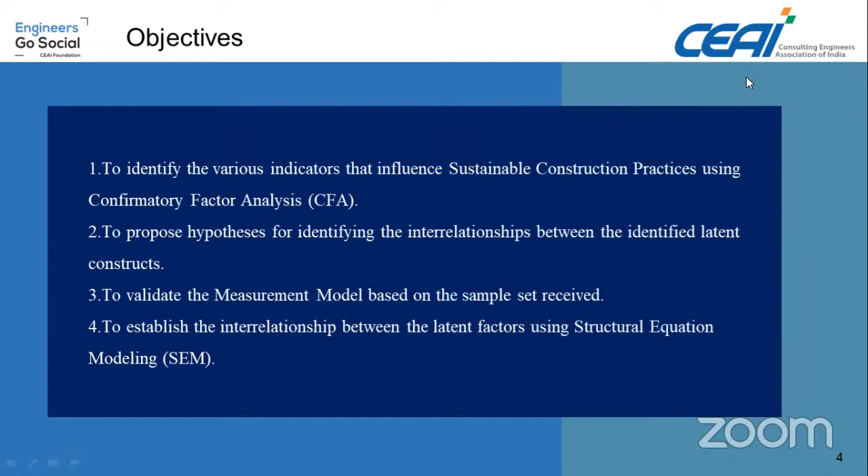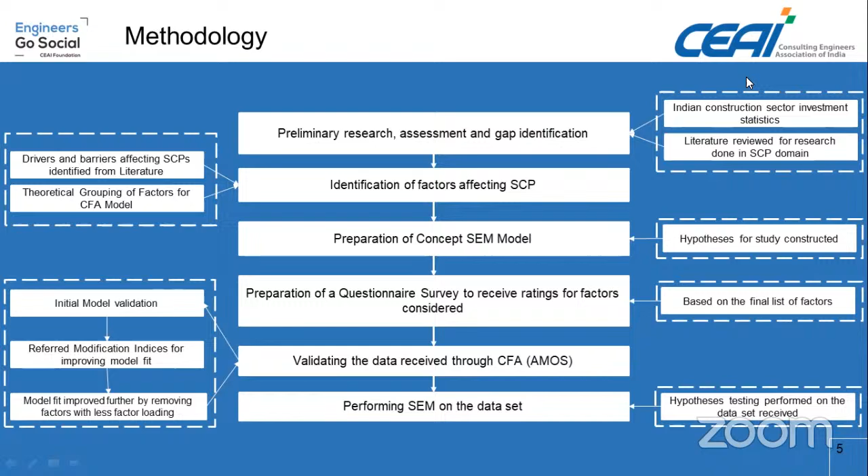For this, a measurement model needs to be first developed and then studied using structural equation modeling. Overall, this was the methodology of the study: I first identified the factors, shortlisted them, proposed a concept model, prepared a questionnaire, validated the model, and then tested my hypotheses using structural equation modeling. In CFA, we need to theoretically group the various factors identified from the literature. I had identified close to 17 factors from the literature.

These were grouped into five latent variables, which you can observe on the left side, with codes of the relevant factors mentioned as well. This was the concept model proposed for my study, along with the substantial hypotheses we proposed to study and identify whether they were null hypotheses or had an actual effect on the overall dynamics of perception. After the questionnaire was prepared, it was floated through LinkedIn.

And it was floated to 6 major stakeholders who can be classified as designers, green building consultants, contractors, project managers, client, and academia. I needed a minimum of 95 samples, and with a minimum of 103 samples, this study was carried out.

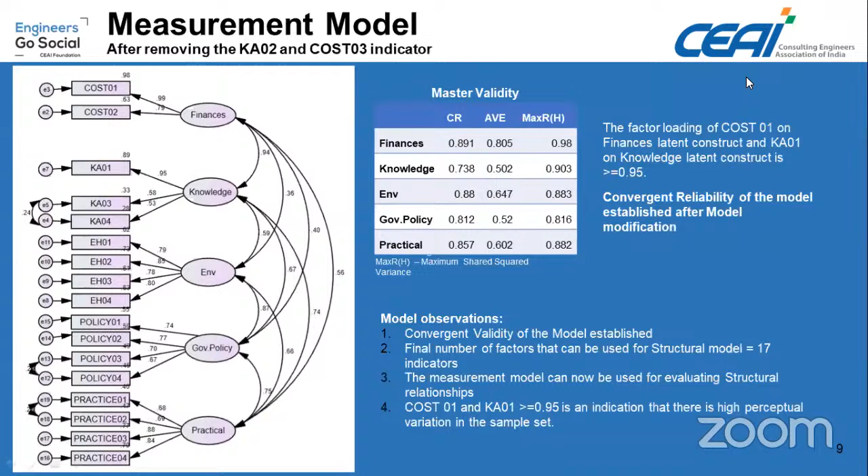The measurement model basically allows me to validate all of the responses that I've received, and it allows further tests to be calculated and carried out. With this, I received a good go ahead on the measurement model.

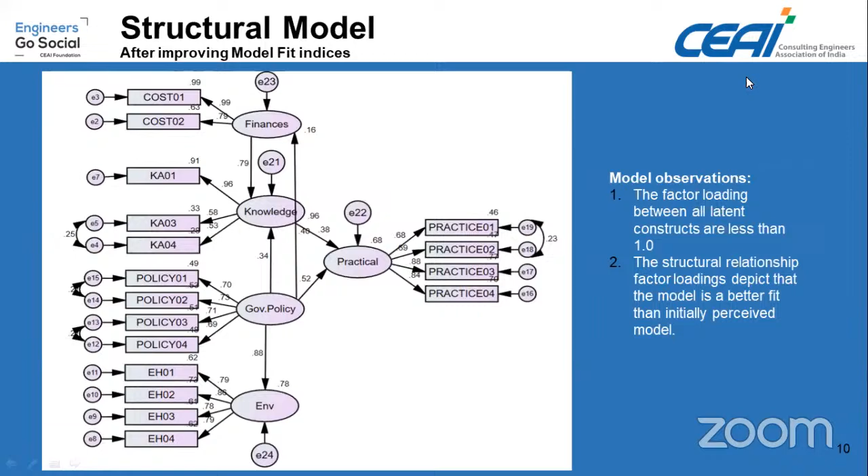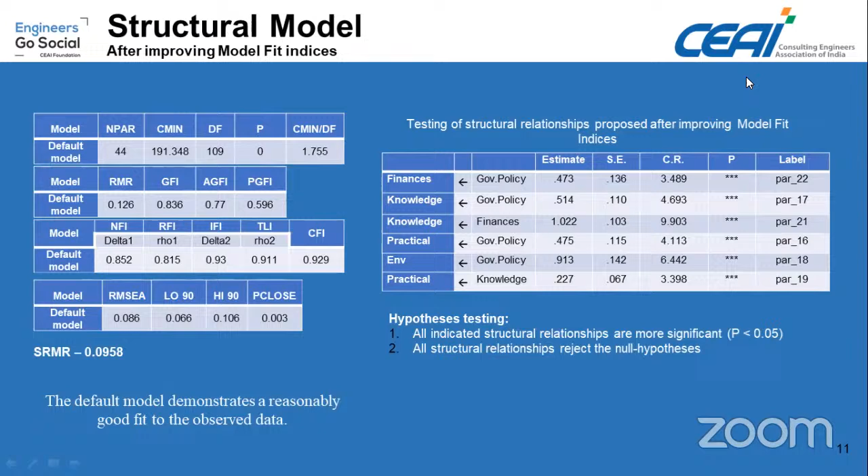After receiving my model fit indices, a structural equation modeling was performed in AMOS software. The path diagrams within the latent variables are the hypotheses proposed in the earlier phase. After performing the weighted calculations of the hypotheses, we found that all the hypotheses are valid, because in the right hand side table, the p-value is significant, which indicates that these hypotheses are very valid and that each factor has a subsequent effect on the next adjacent factor.

With my concept model being validated, I found out that financial decisions have a major impact on structural sustainable construction practices that are taking part in India.

And that's it from my end.

Good afternoon, everyone. I am Shailesh Biradar from Balaji Railroad System, India's first railway consultancy, assistant manager in business development and proposals, also MTech scholar from NIT Surat.

So the research gap is we don't have a collaborative construction project study in India. Abroad, we have several studies, but for the Indian perspective, we hardly have any papers.

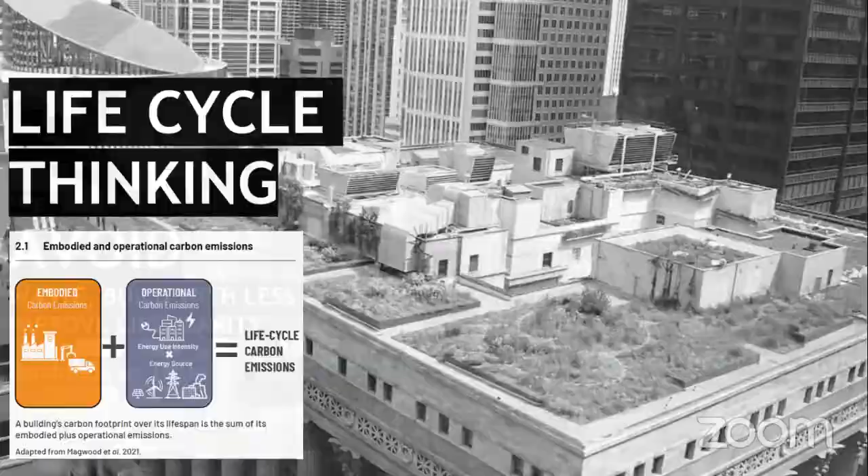Starting with life cycle thinking, carbon is mostly thought of as operational carbon, that is heating, cooling, and lighting systems, but there is also embodied carbon in material sources. So to have that perspective, we need to think about the total embodied carbon, the sourcing of materials, the sustainability, and also the operational phases.

So the first step is to avoid. First we want to avoid waste, we want to build with less. We want our designs to be right where it's needed, so the dimensions are accurate, and we try to propose circularity so we can reuse different components and reuse our buildings overall.

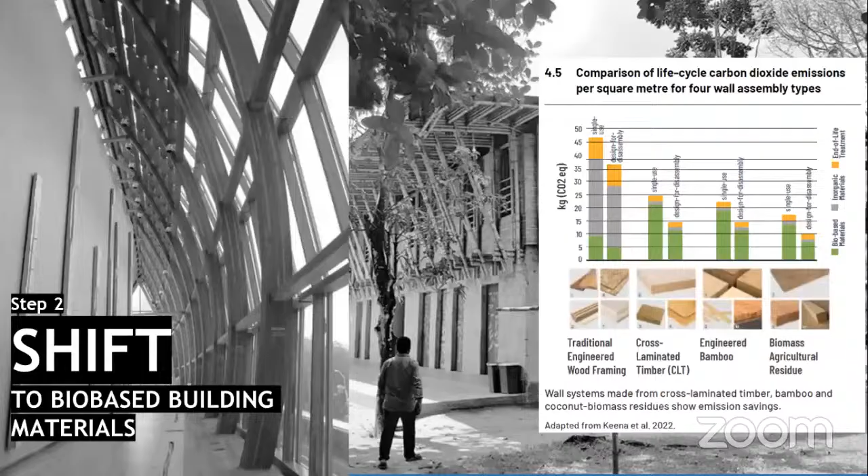Secondly is the shift. First is to avoid waste, then shift to bio-based materials. For our load-bearing components, we propose to continue with concrete and steel, but for other materials we tend to propose materials that are more sustainable to nature, mostly bio-based.

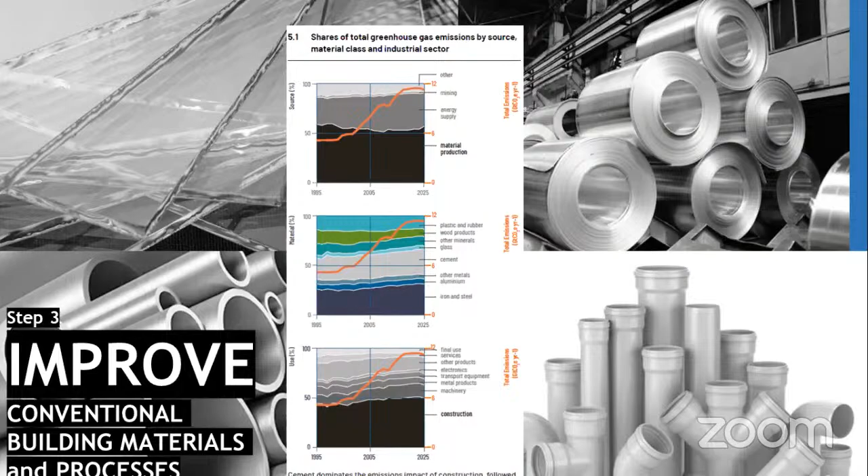Third is improve. The conventional building processes use different materials like glass, aluminum, steel, and polymer. We propose improvement of the production process and the use of those materials in our building system.

Next, what tools can we use to understand how much embodied carbon we have and how green our buildings are? There are a few tools: life cycle assessment, GHG protocol, environmental product declarations, then PEFs and OEFs. These help us understand the total embodied carbon and operational carbon of any building. Now that we understand the steps and how we can measure, we need to incorporate them into policies.

Under the Global ABC, we have so far worked with 7 countries: Cambodia, Vietnam, India, Indonesia, Colombia, Sri Lanka, Burkina Faso, and we are working on more countries. Currently we are working in Bangladesh.

In India, Prime Minister Narendra Modi has proposed that the total industry should go green by the year 2070. So we have come up with proposals aligned with this three-step process: avoid, shift, and improve.

Lastly, I'd like to say it's not that difficult. Our built environment gives us the space we live in and develop ourselves, but it is not very difficult to green it. We were green before. For rapid growth we tend to choose more carbon-producing materials, but we have the solution and we will do it. Thank you.

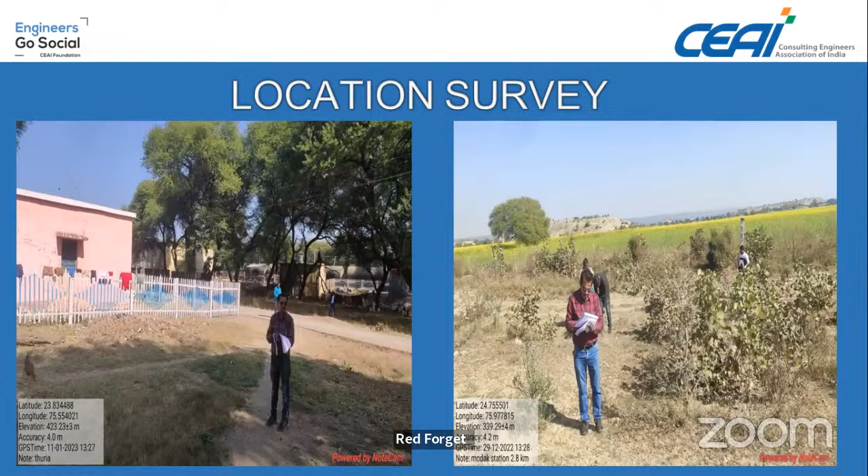There appears to be some network problem. The voice is not clear.

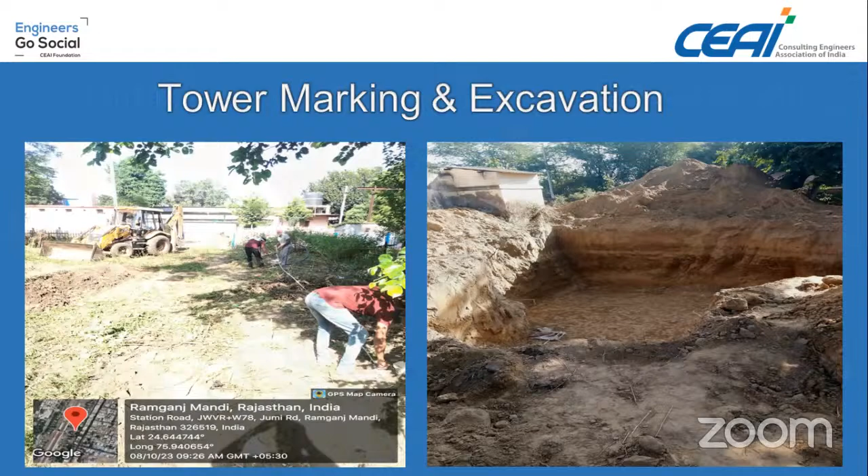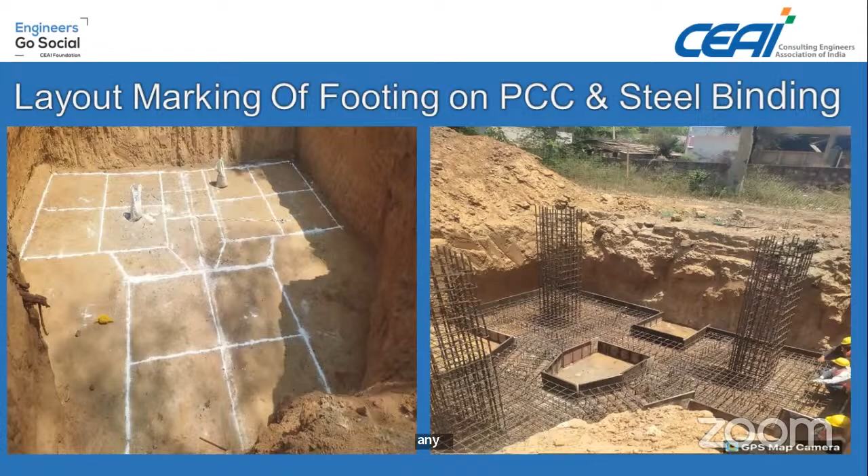Tower marking complete, from tower. Excavation complete. Layout of markings for footing tower, PCC, and steel binding - tower marking complete. Bending.

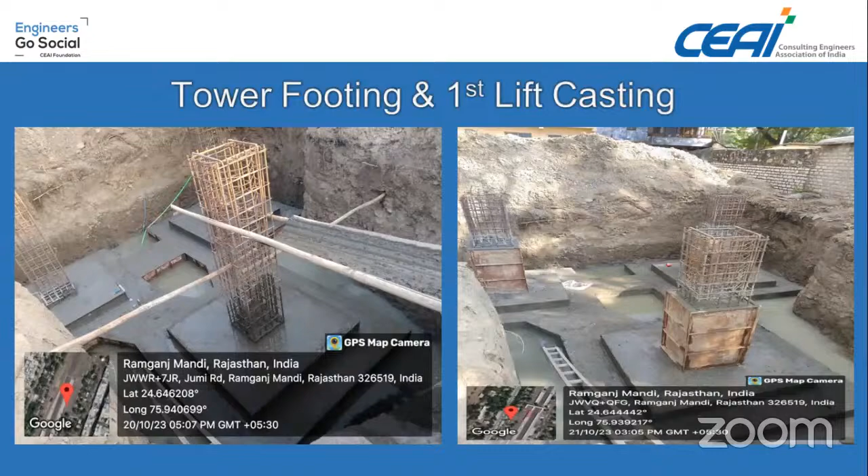I think there is some network issue here. We can skip, we can meet.

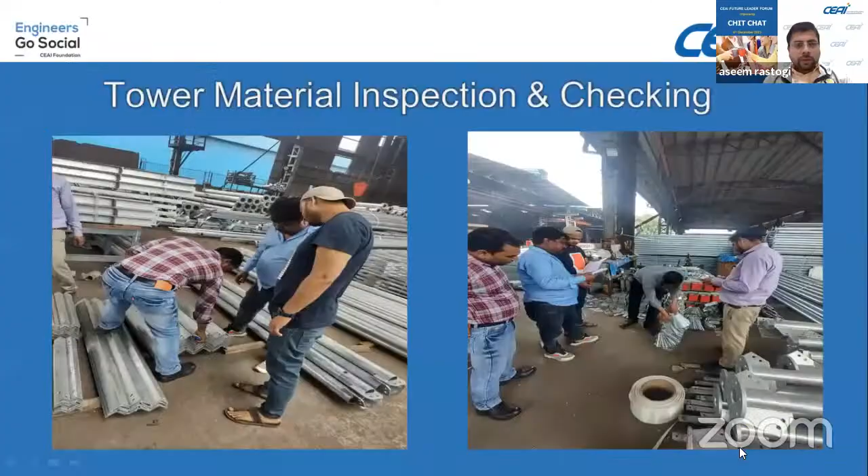Wait, Sophia is not able to unmute. Can you hear me, sir? Yes, Sophia, we can hear you. Yes, thank you sir. You can switch on your video also now. Sorry sir, I'm actually traveling, so I couldn't switch on from the laptop. Okay no issue. Just ask Meher, please, you start the presentation.

Good evening to everyone present here. It's me, Sophia Emanuel, PhD scholar from NIT Trichy. So today I'm taking something out of tech, that is the seashell serenity, the soothing sound of the sea.

Talking about the seashell, we all look for something in this busy world. From morning to evening, we are stressed with so much work - deadlines, assignments, tasks to complete. Since we have a lot of deadlines, we always try to seek a place where we can sit calm, relax ourselves, and calm our mind. So today I'm going to talk about something that's really amazing to me.

That's nothing but something very close to the ocean, very close to the sea. So we all search for something kind of yoga that connects us to nature, or kind of meditation. Every one of us sits and ponders on what strategies each one thinks about - we have many. Coming from Andaman and Nicobar Islands, being an islander, I always seek to be close to nature, close to the ocean.

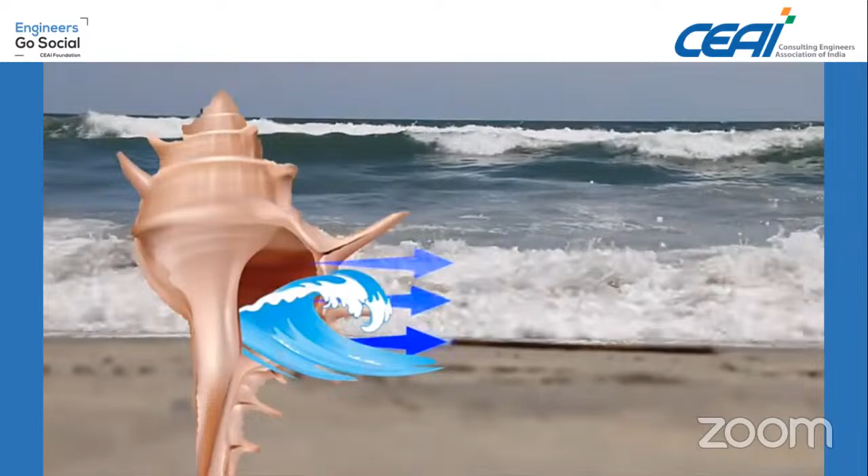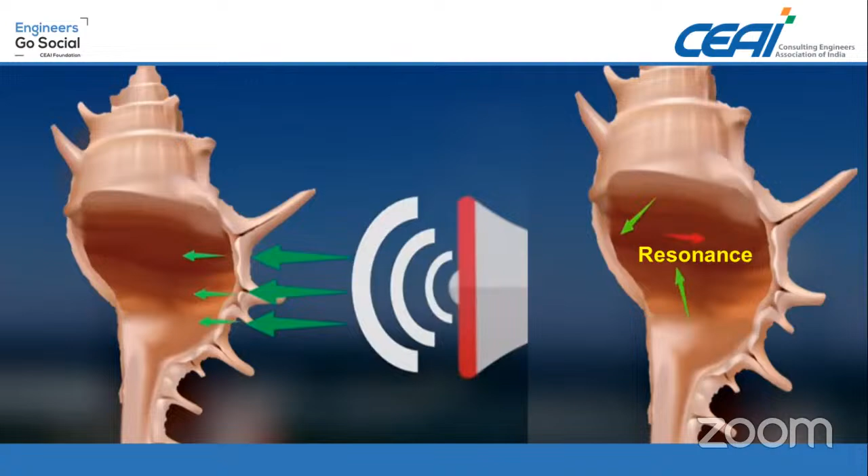These amplified sounds create a resonance and produce a soothing, whooshing sound reminiscent of ocean waves. To talk more about these seashells, they are very close to a sacred emblem in our nation - in India we call this Shankha. It's also known as the divine conch. This Shankha has deep significance in various cultures and religions, particularly Hinduism and Buddhism. It's very sacred, and people think that earlier the tribals used it for driving away evil spirits.

Recently it's used in homes so that when you blow it, these acoustic waves get amplified, and this noise is believed to invoke positive energy. It's because of this spiral shape that symbolizes the infinite cosmic energy that it can retain.

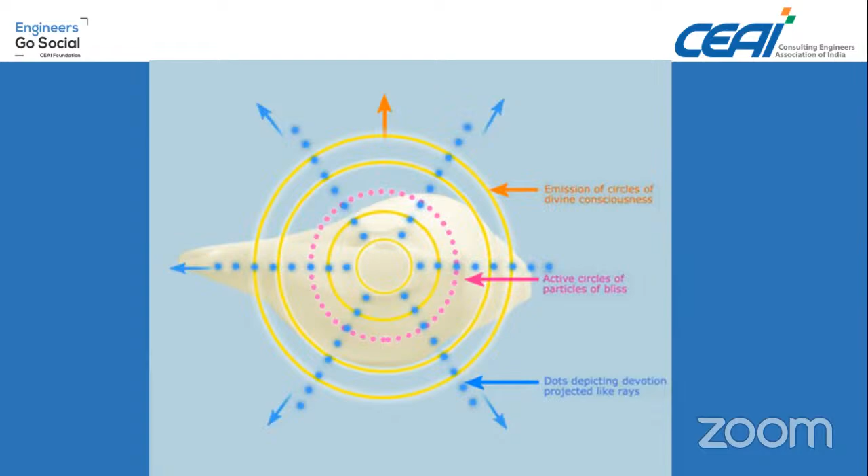Talking more about it, I would just like to say a simple seashell is just a portable way that can bring a lot of tranquility in your day. It can really soothe you and calm you wherever you are - it doesn't have to be close to the sea and ocean. So today, this is just a takeaway from my experience - I would really travel along carrying the seashell. Thank you for giving me this opportunity to participate in this chit chat. Thank you.

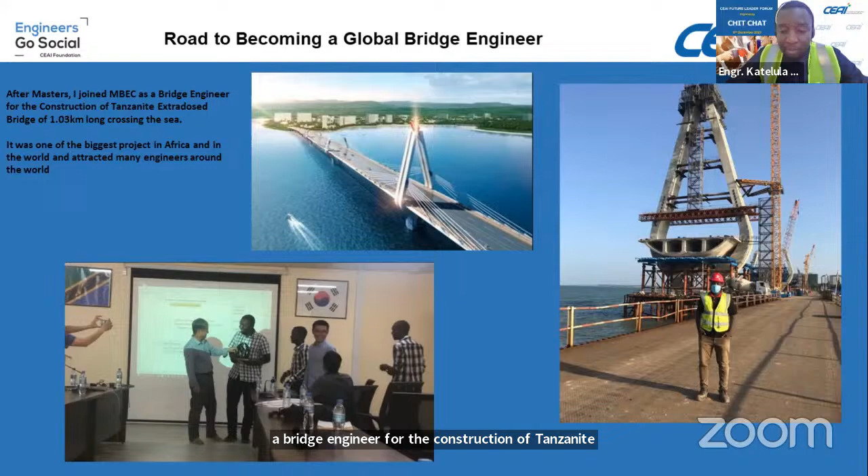Back home, after my master's degree, I joined MBEC as a bridge engineer for the construction of Tanzanite Bridge, which is one of the longest extradosed cable bridges in Tanzania, and also one of the biggest projects in Africa and in the world. It attracts many engineers around the world, and for me, I believed that this was the number one project in Tanzania, and if I became number one in this project, then I'd be number one in the world and able to work everywhere.

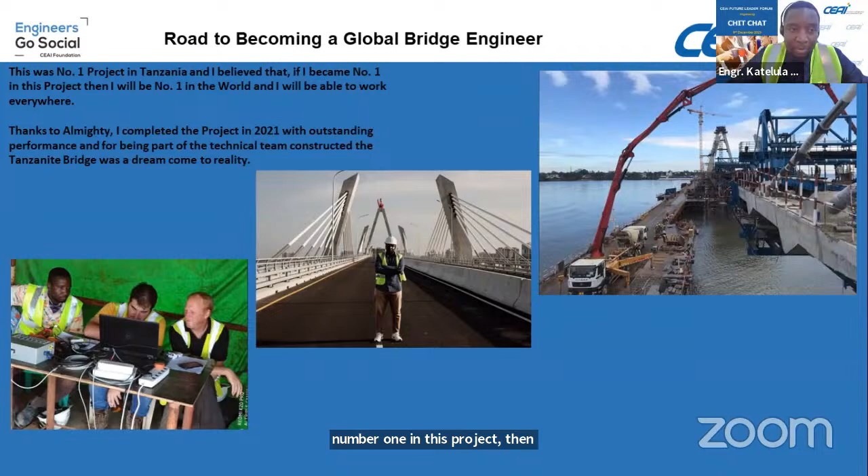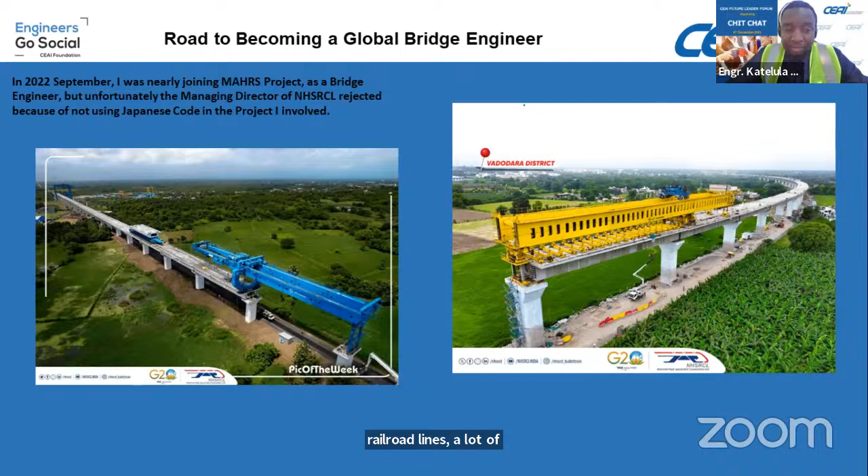Thank God, I completed the project in 2021 with outstanding performance, and in September 2022, I was nearly joining the MAHRS project, one of the longest railway lines with a lot of bridges in India. Unfortunately, I didn't manage to get the opportunity - I was rejected by the managing director. But it was a motivation and an inspiration for me to get an opportunity to be involved in or interviewed for such a project.

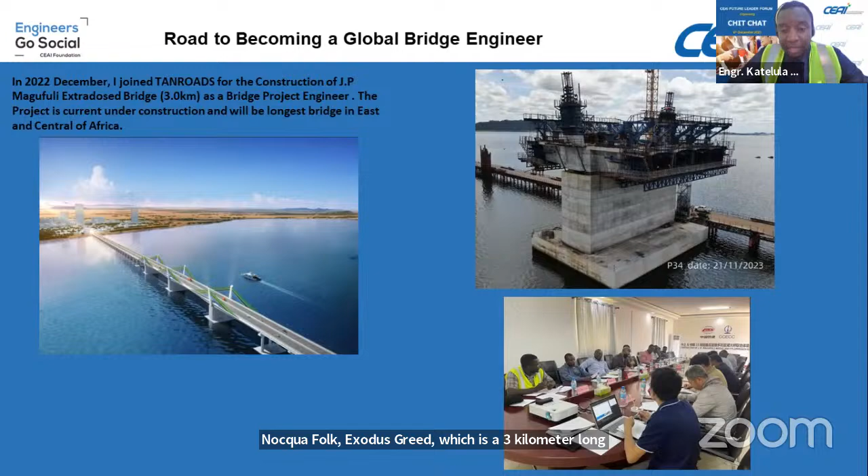In 2021, I joined IABSE, the International Association for Bridge and Structural Engineering, with the purpose of sharing and seeing what other people are doing. In December 2022, I joined TANROADS for the construction of the JP Magufuli Extradosed Bridge, a 3-kilometer long bridge, the longest bridge in eastern and central Africa. Being the leader and engineer of this project gave me an opportunity to grow more, because this is my second extradosed cable bridge in my career so far.

We used to dance when I was in China, with my friends, with my colleagues, and travel a lot - to Turkey, South Africa, India - to learn more about bridges and to get an opportunity to interact with other people around the world. For me, this is the inspiration for myself, my family, and other young engineers who want to become a global bridge engineer, because if you get an opportunity, you can become a global bridge engineer.

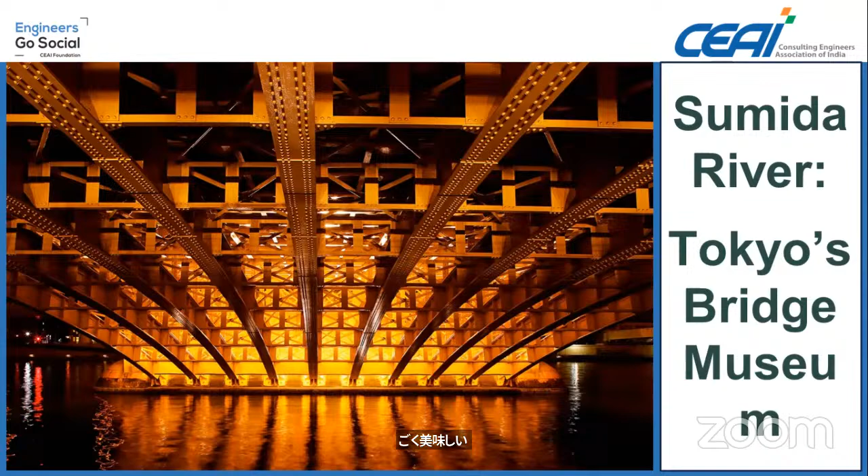Beyond being a symbol of beauty and serenity, it stands pivotal to the growth of Tokyo, inspiring generations of artists and engineers alike. From the lively riverbank captured in this image of 1963 to the modern-day skyline, graced by 26 engineering marvels over a 27-kilometer stretch of the river, the story of Sumida is etched in its bridges.

Once shattered by the Great Kanto earthquake of 1923, these structures now stand resilient, telling tales of determination and innovation. They not only survived wars and bombings, but stand tall as testament to Japanese steel engineering prowess.

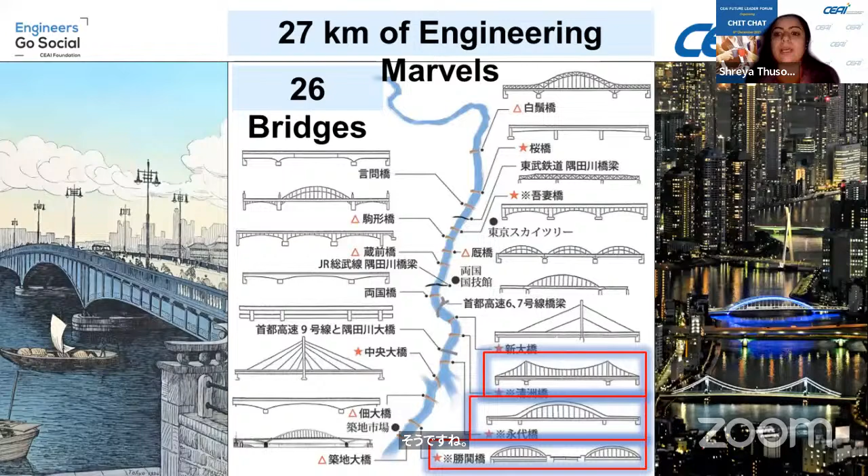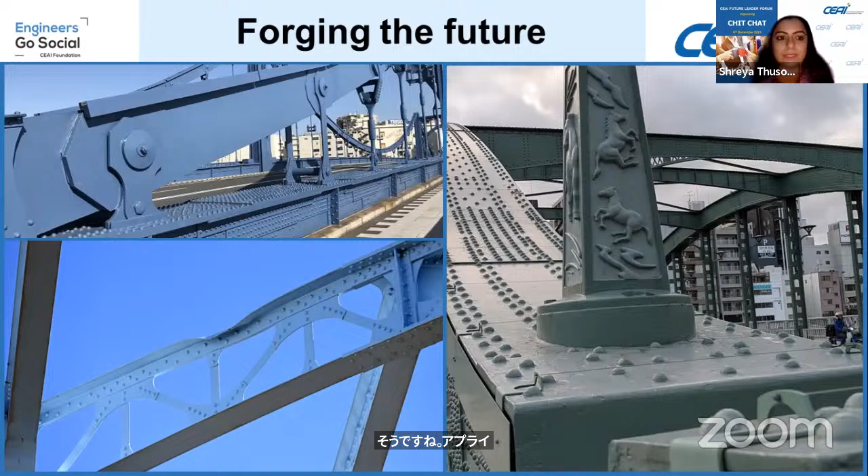Their construction was part of a revolution in bridge engineering, led by a young engineer like us, Mr. Yutaka Tanaka. After returning to Japan from Germany, he brought with him revolutionary bridge engineering techniques, and as head of the Reconstruction Bureau after the earthquake, he applied cutting-edge methods, crafting bridges that are virtually indestructible and can survive the test of time.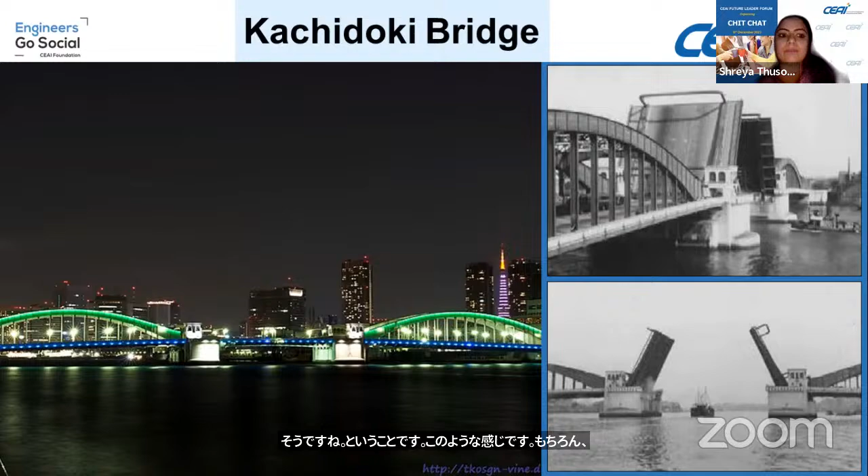Greeting you at the entrance to Tokyo is the Kachidoki Bridge, which proudly boasts the world's first design of a bridge using Ducol steel, a naval innovation tailored for strength. At a time when resilience was of paramount importance in Japan, this shaped the design philosophy of that era.

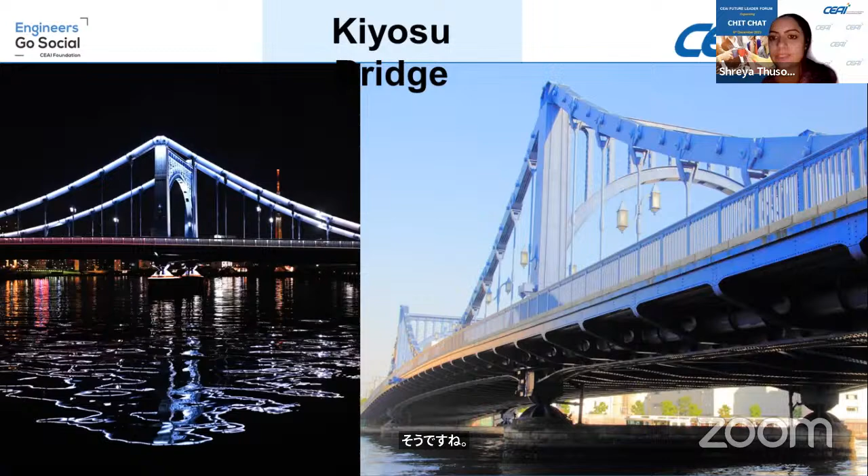Kiyosu Bridge and Eitai Bridge opened in 1940 and were the first in Japan to use a pneumatic caisson foundation, a technique borrowed from America. By its second application in this Kiyosu bridge, Japan had already developed its unique specifications for design against earthquakes, a testament to Japanese engineering prowess and understanding of earthquakes.

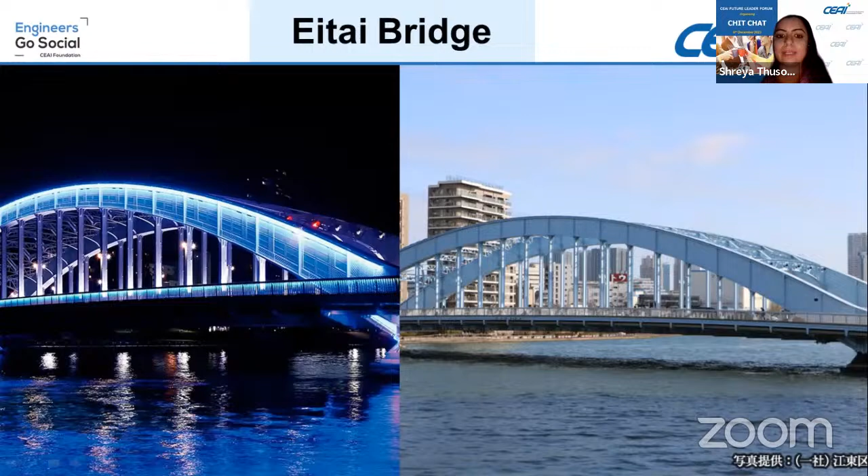Even now, these bridge foundations don't show soil damage, and they are not affected by the earthquakes that directly hit the Tokyo metropolitan area. These bridges are designated as bridges of national importance.

Another philosophy developed at that time was uniqueness in design. Diverse shapes were chosen deliberately to prevent all structures from becoming obsolete at the same time. Each bridge now proudly showcases its individuality. Even the colors of each bridge are different, signifying the history behind them.

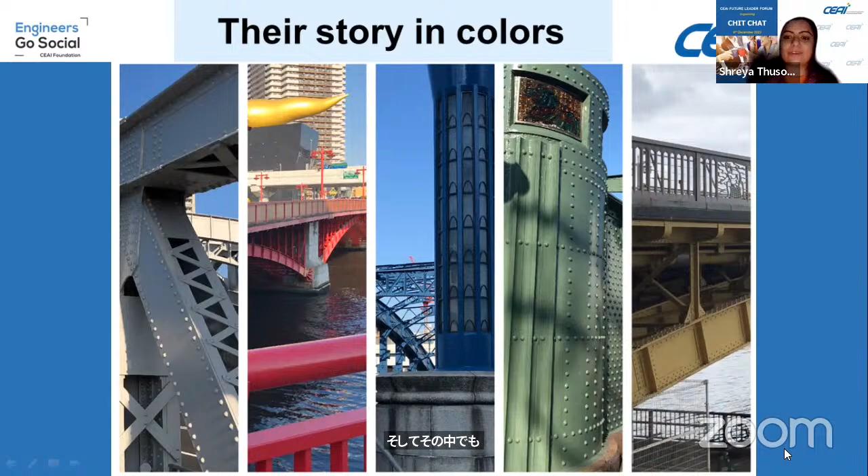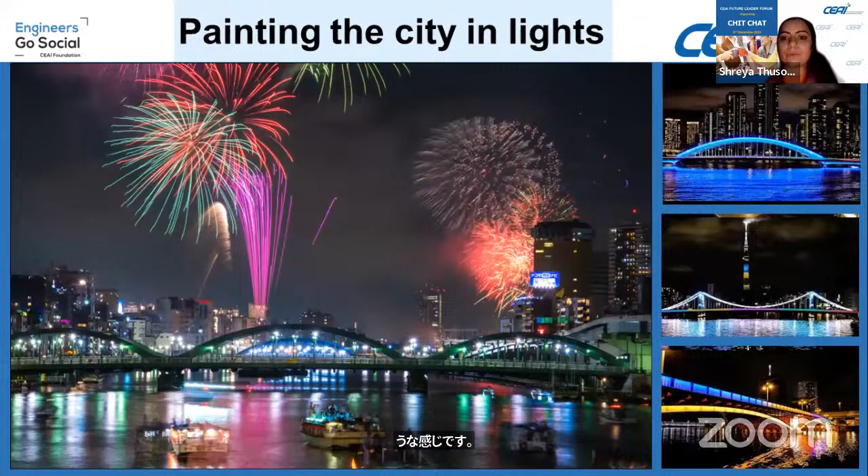Recently, they introduced LED lightings for the 2020 Tokyo Olympics. For the LED lightings also, they underwent careful research and deliberation to choose each lighting color. The resulting symphony of lights, bridges, and summer fireworks creates an awe-inspiring spectacle that just makes you want to be there in Tokyo.

So next time when you visit Tokyo, be a proud bridge nerd and take a cruise in these futuristic looking ships, these boats, so that you can spot innovations in this open air bridge exhibition. Or you can just take a leisurely stroll on the Sumida Terrace for a romantic evening.

Until then, like me, when I miss Tokyo, you can turn on Google Earth, go 3D, and dive into the stories behind these 26 bridges, each narrating its unique history. So this was Sumida River, the Bridge Museum for you, a place where innovation converges with history.

In conclusion, I want to impress upon you that as engineers, we are history makers. Our creations today will become the iconic structures of tomorrow. Each bridge is a signature bridge, each building is a signature tower. So let's take pride in our work, for we are forging a legacy that will withstand the test of time. Thank you very much.

Yeah, shall I start? Yeah, sure, sir.

Very good evening. I'm Dr. Ramesh Nayak from IIT Dharwad. Today I'm here pitching Home Harmony, navigating the affordable housing challenges.

As we know, this is a major challenge due to rapid urbanization and growth in population, which has led to demand for housing that is not being met. There is a significant gap between the required supply and demand of affordable housing, because in most developing countries, including India, there are many houseless families.

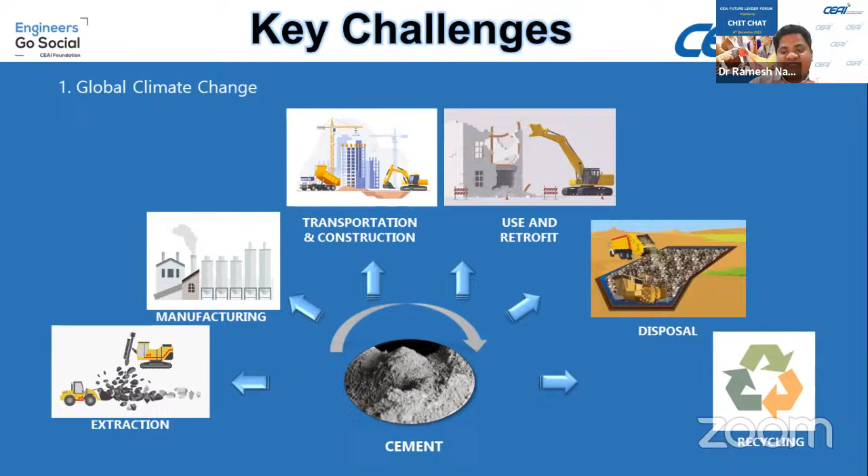Another side is the rise in cost, and wherever we use traditional materials such as cement or other natural resources, they also have a great impact on global climate, including from the stage of extraction to the disposal stage, which contributes to carbon emissions.

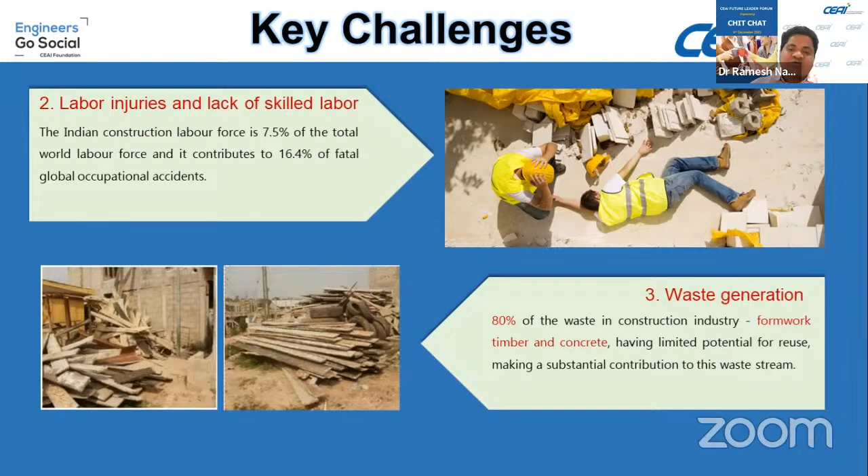On the other side, in construction with traditional practices, there are labor injuries and a lack of skilled laborers in the construction industry, which is also a major reason for not meeting the demand of housing in India. Additionally, a huge amount of waste is generated from construction practices, so there's a need for modern construction techniques.

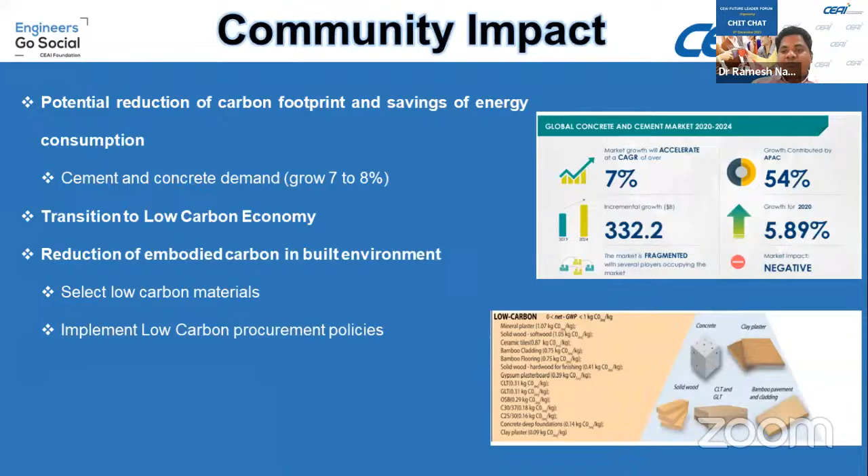There is also a huge production and consumption of construction materials, which leads to C&D waste production. To address all such issues, we need ideas that can impact the community, such as potential reduction of carbon footprint and saving energy consumption by reducing traditional cement and concrete production, which is growing by 7 to 8%, and transitioning to a lower carbon economy in affordable housing will also contribute to society.

To address that, there is a technological intervention we can bring in: six sustainable housing practices, including suitable industrial waste, workability, achieving strength, durability, and making it cost effective, and finally achieving sustainability by preserving our natural resources.

This is a schematic way. There are many already existing government schemes and initiatives, such as schemes for economically weaker sections or middle income groups, and many others that state and central governments have initiated. Only thing is, this cost is not sufficient for housing for any households or habitats.

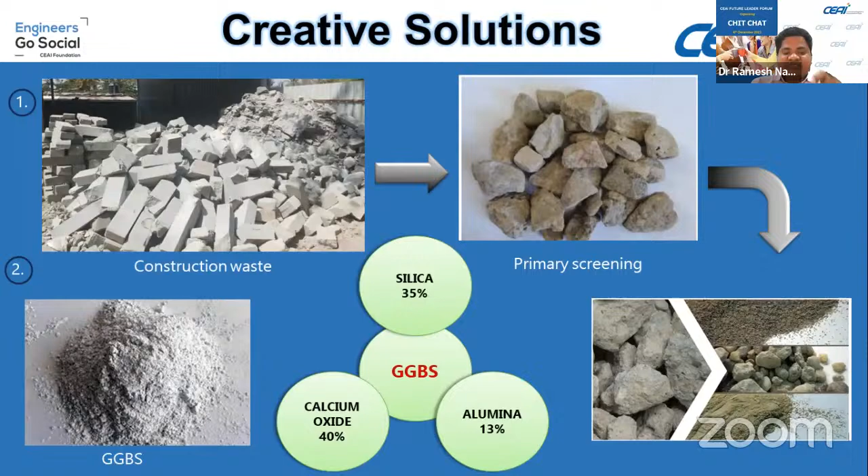Therefore, there is an alternative, creative solution: making use of C&D waste or any industrial byproducts by replacing materials, so they can overcome the increase in material cost and afford a house using materials locally available in their vicinity, such as GGBS, fly ash, or C&D waste, or any agro waste such as RHA and many other things.

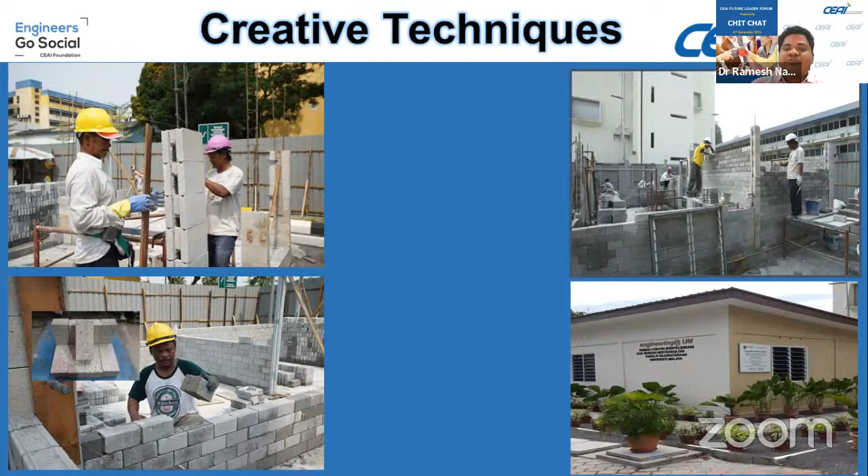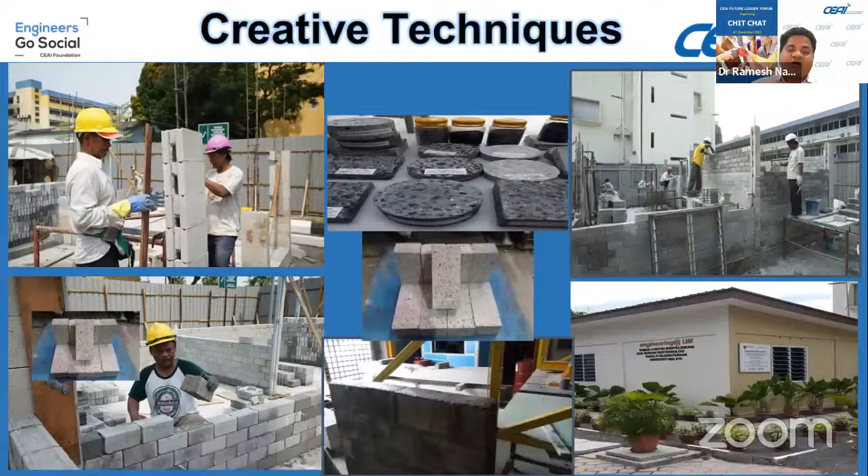To overcome the shortage of skilled labor, we can introduce modern techniques such as prefabrication techniques or interlocking block or brick systems, where we can bring out techniques to overcome the skilled labor shortage and also have a house at an affordable cost. These are some of the techniques I'm trying to introduce through this session.

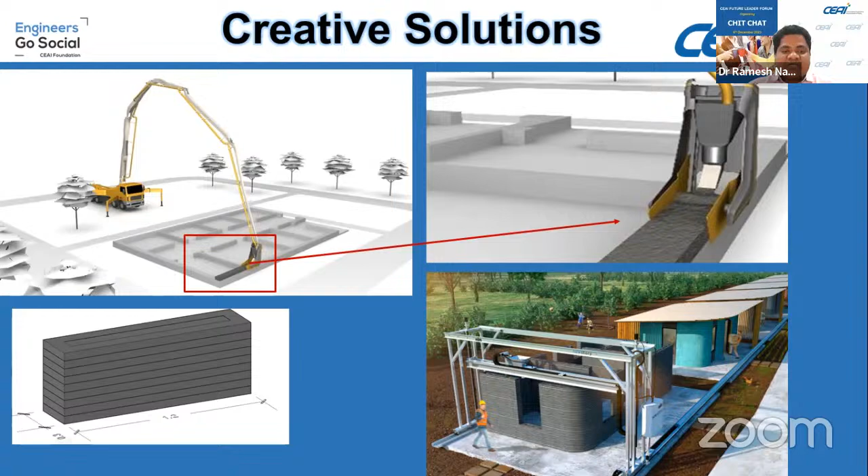Now coming to a trending technology called 3D concrete printing. Although with 3D concrete printing you are able to construct a house in very little time, however it leads to higher cost. The very reason for the higher cost is material, because it requires a higher quantity of cement.

To overcome that, we can come up with some sustainable materials. By means of all these modern construction techniques or materials, we can empower communities. Already, the Building Materials and Technology Promotion Council of Government of India is working in this line, and we can also contribute. These are some of the attempts made by many NGOs or companies contributing to the sustainable development goals.

If you look forward, the demand for affordable housing is drastically increasing, with a CAGR of 4.9%. Therefore, through platforms like this, CEAI, Consulting Engineers Association, we can create awareness and promote sustainable materials and sustainable technologies, so that we can meet the demand for affordable housing.

With this note, I would like to conclude my talk, and thanks to the CEAI for giving me this opportunity. Thank you.